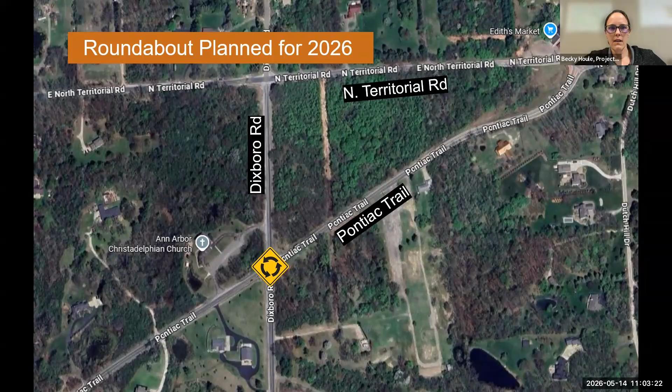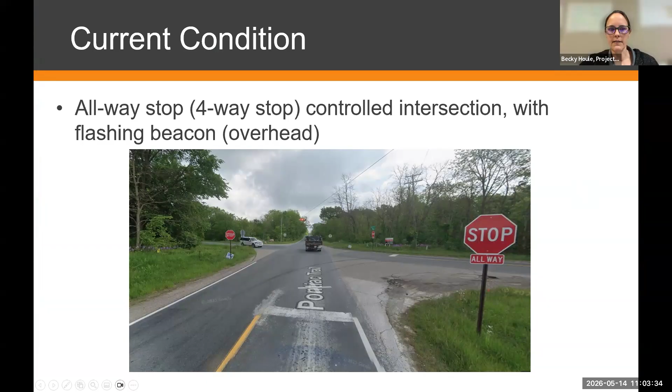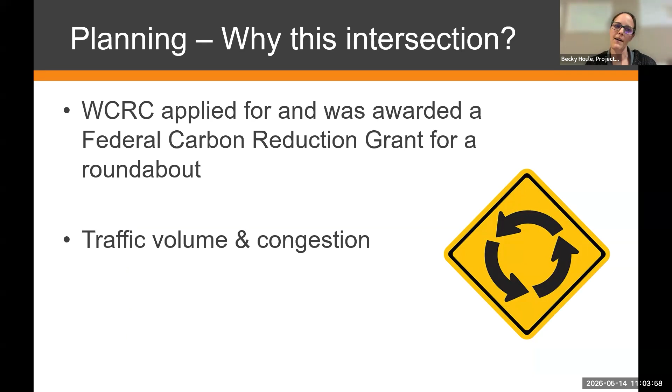We applied for and were awarded a federal carbon reduction grant to build this roundabout, and we received this funding due to the volume and the congestion that happens, particularly during rush hour times. So because of the high volume, we were awarded the grant.

So the funding comes from the carbon reduction program, the MTF. It covers what the grant does not, and this roundabout is estimated to cost about $1.5 million.

I'm sure you all are familiar with how to go around a roundabout, but the entering traffic has to yield. Everybody goes counterclockwise. The splitter islands, when you approach the roundabout, are used to control the speed. And yes, big trucks and tractors will be able to go around the roundabout. You can see in this picture from the one at North Territorial and Pontiac Trail that there is a semi that is able to pass through there just fine.

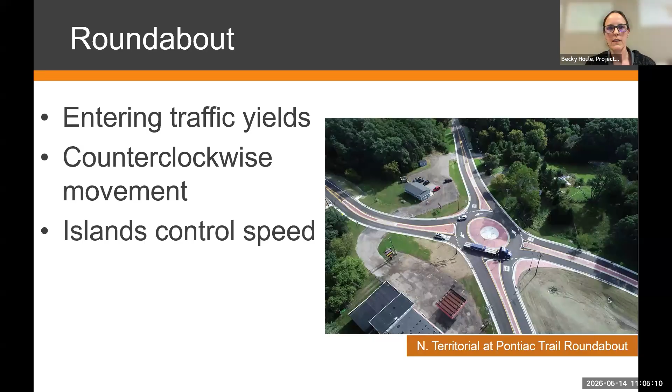So the tentative schedule: we're in the June 5th MDOT bid letting, so that's when we will know who the contractor will be. It takes a few weeks for it to get awarded and get everything planned. So we're expecting the road closure to happen around the end of July, and it should be open to traffic by the end of October. And as with everything construction, this is all weather dependent.

So these next couple slides are some pictures of what you can expect to see if you were to watch the progress happen at the roundabout. First we will remove the pavement as shown in this picture here.

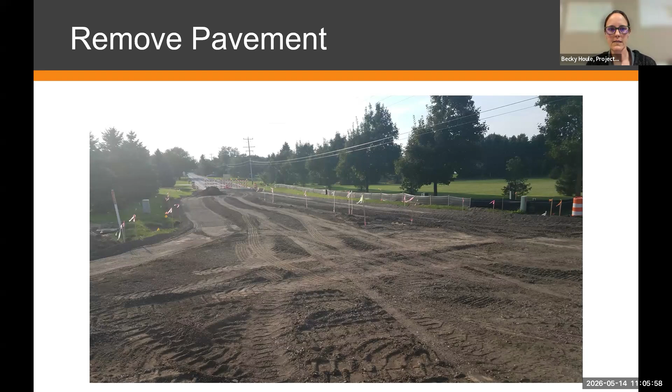Then we'll place the stone base to build up a good base for all the new pavement. Then we prepare for the curb, so we'll build the forms. This picture here is showing them putting in the forms for one of the splitter islands.

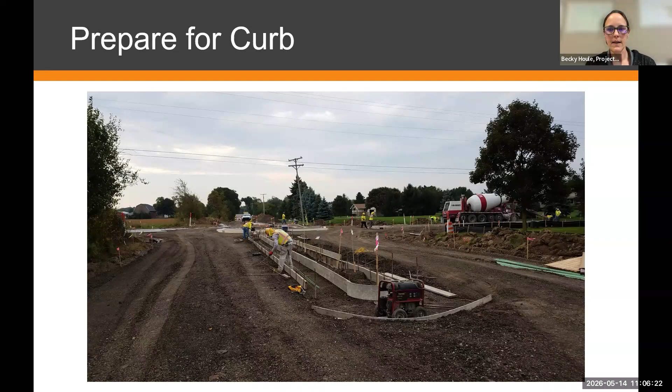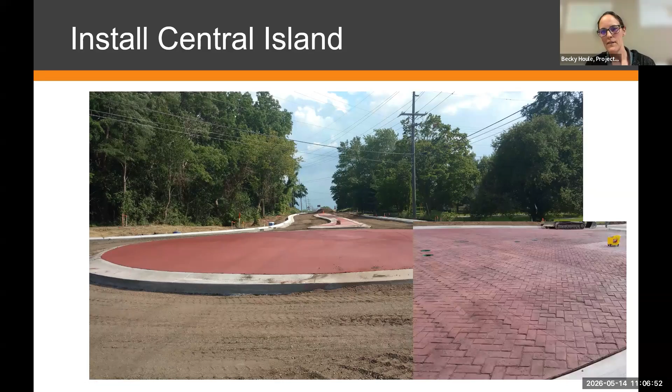Then we will install the curb and then the decorative concrete that goes in the middle of it, as shown in both of these pictures here. And then we'll install the central island at the same time as we do the other splitter islands, but here's a good picture of an example of what the island will look like. It'll be decorated or have a pattern similar to the one shown in the bottom corner of this.

And then we will pave the road. So really see it starting to come together.

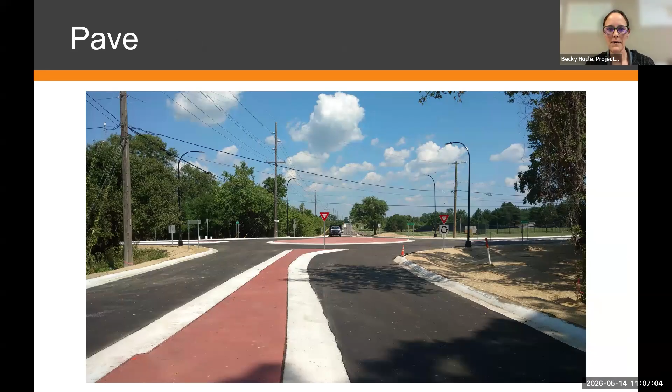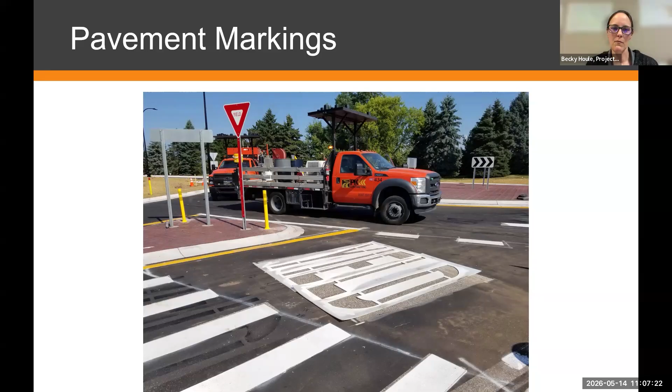Then we put the pavement markings in. This roundabout will not have any crosswalks, but we will have the yield signs, the arrows in the middle, all the yellow and white coming up to it. And then the signs will look similar to this one. There are some new standards with MDOT, so some things will be slightly different, but for the most part it looks very similar to the one in the picture here.

We want to remind everybody that during construction, the road is closed, so that means you cannot get through, so please don't try.

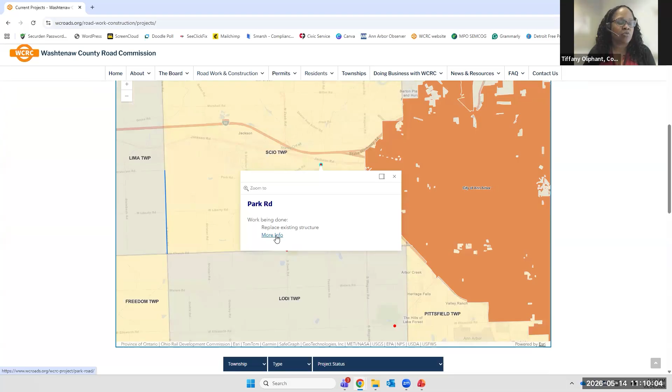For this project, our map is interactive. Once you click on a red dot there, it'll be the project. You can click on more information and it'll take you to the project page. Or you can come down and scroll to find the project cards, and this will take you to the project page. This project is Dixboro Road at Pontiac Trail Roundabout.

So here you'll find on the project page a map of the project intersection, Northfield and Salem Township, 2026. It's a roundabout, and all the information, Becky's contact information, her email address, her phone number. This is where we're updating all of the information about this particular project. We will have project updates as far as construction, road work, when the road is closed, when it reopens, and the story behind this. We will also have helpful links on the side.

The detour is here. We had a design meeting with the presentation and videos just like this. Now we're having the construction meeting, so the presentation and slides are here that you're seeing now. Once this recording is processed, I will upload this to the website and you will find it here.

Also some roundabout information, some videos about how to move through a roundabout. And also, we've done some work already for this project, so just an FYI.

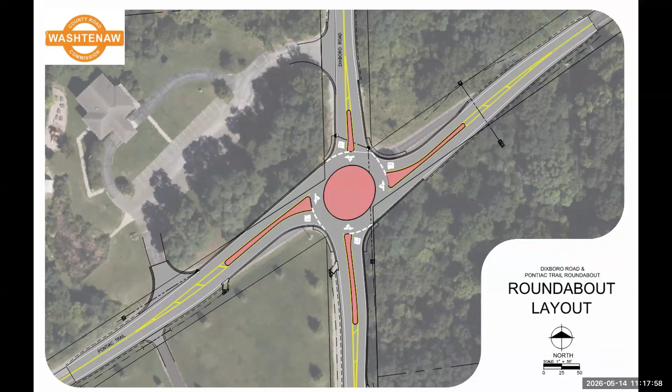Omar asks, will there be signs indicating that we yield to traffic within the roundabout? As the comment above indicates, there seems to be confusion about yielding for some drivers, even when the roundabout is empty. We will have the standard yield signs that you see at all roundabouts. The signage will be very similar to the one at Pontiac Trail and North Territorial.

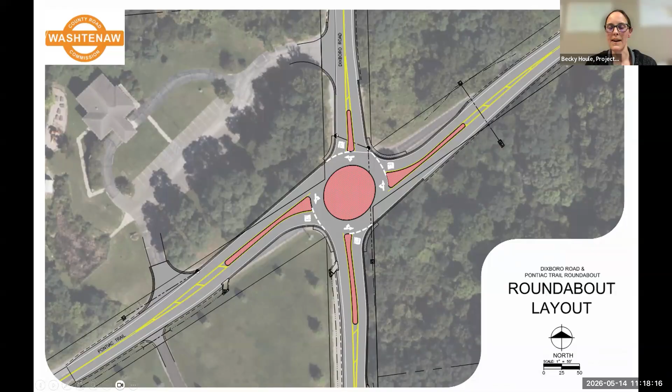Rick asks: I joined a few minutes late, so apologies if this was already discussed. What is the scheduled closure date and completion date? We're planning on closing the road sometime late July, and it should be open by the end of October.

Rob asks, has the road commission studied how this roundabout will alleviate traffic congestion at this intersection during rush hour traffic? Brent is getting on right now to answer that one.

We hired a consultant to help us look at the layout and the level of service through these intersections. As we're looking through the design, we're looking at the amount of traffic that goes through these, and we're sizing it appropriately for this intersection.

Rob also asked, how does the expected improvement in congestion compare to any improvement seen at the nearby North Territorial Pontiac Trail roundabout? It'll be similar, as far as that helped alleviate congestion at that intersection, so we'll see similar improvements here at this one.

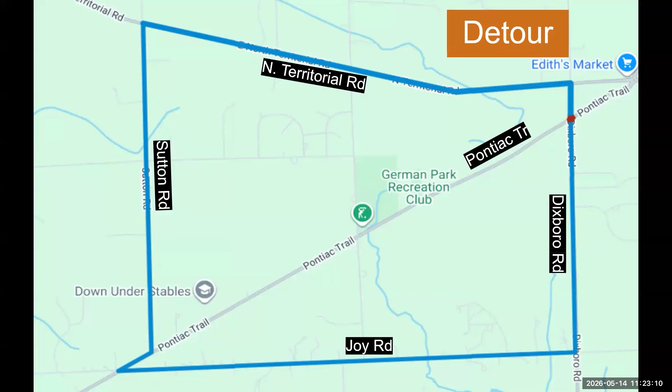In the chat, I asked Becky, do you have any, did somebody message you before we leave? No, nobody messaged me, but like you've mentioned before, you can check out our website, join our project page, you'll get all the details of this. We also have more information on our website if you want to learn more about how to travel through a roundabout.

Regarding the detour down Joy Road, we will do extra scraping and dust control. That's part of the plan, and we'll address any additional issues that happen throughout the project. You can let me know, or do a SeeClickFix, or the WCRC fix-it, I guess it's called, or call the front desk, and we'll make sure it gets to our district foreman so we can address any of those issues.